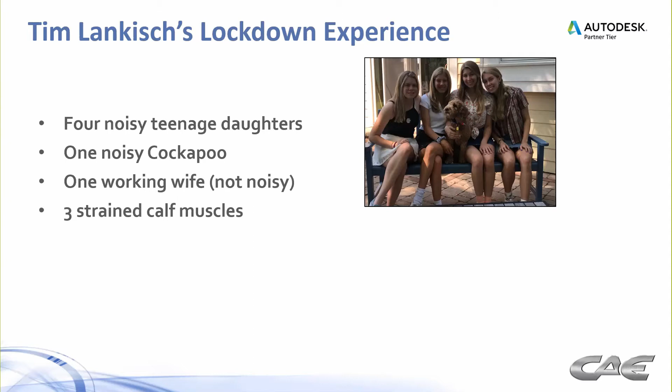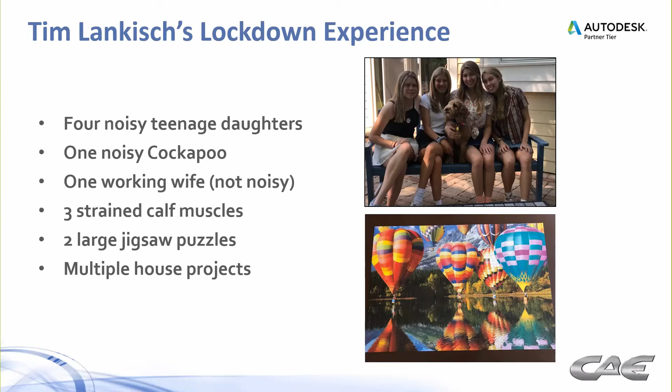So here's a little bit about my lockdown experience. I'm sure you guys have had similar experiences yourself, but I have 4 teenage daughters, and being at home with them didn't make for the most pleasant experience when it comes to the noise factor. Luckily, being on the ventilator project, I was deemed necessary, so I was able to come into the office. We have a small office here, and also a very noisy dog, Willie, in the middle of the picture. It was good to get away from the house and the noise while my children were home from school. My wife, unfortunately, had to bear the brunt of that. She was working up in our bedroom, and she's not a noisy one herself. At the beginning of the lockdown, I thought I'd try to get back in shape a little, and I tried running, and 3 strained calf muscles later, I decided 50-year-olds probably shouldn't try to run. Some of the fun we did: 2 large jigsaw puzzles, one a 2,000-piece puzzle, and multiple house projects. If you had to put a silver lining on this lockdown cloud, I guess those would be some of those things.

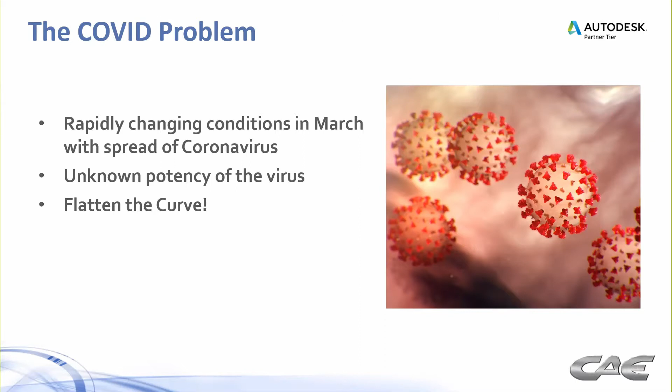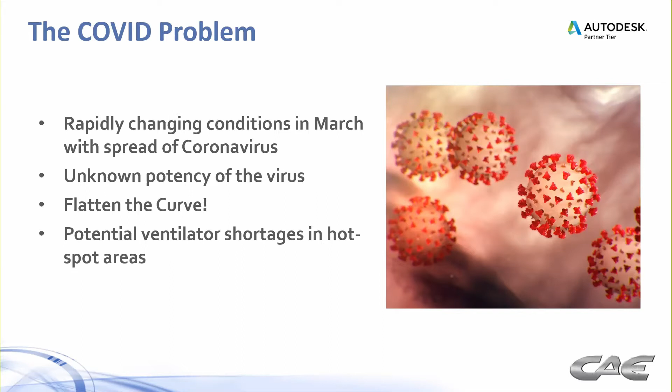So the COVID problem. You've heard chapter and verse on this over the last 4 or 5 months. Back in March, there were rapidly changing conditions with the spread of the coronavirus. Nobody really knew how potent it was. We talked about flattening the curve. Everybody was in rush, panic mode. Especially up in the Northeast, New York, and New Jersey, the potential ventilator shortages in those hotspot areas were becoming a real thing. So we had to bring the power of American manufacturing to bear on that. It's really interesting to read all the articles about how everybody came together, particularly in the plastics industry. We should be proud of what we've done with all the PPE equipment and ventilators. When the people and their government have a common purpose, great things can happen.

It's amazing how many of these stories we've seen in trade magazines. Autodesk's role in the manufacturing world is played out in hundreds, if not thousands, of ways during this crisis. The Make Anything model, from design tools to simulation tools to manufacturing tools, has played a huge role across the country. Moldflow's role in particular, which is what I'm going to talk about today, in the plastics manufacturing world - we'll show you a case study about how we brought the power of Moldflow to get a rapid response on this ventilator. I would argue that Moldflow's role in the plastics industry over the last 30 years, I don't know of much else that has had as great of impact as Moldflow has.

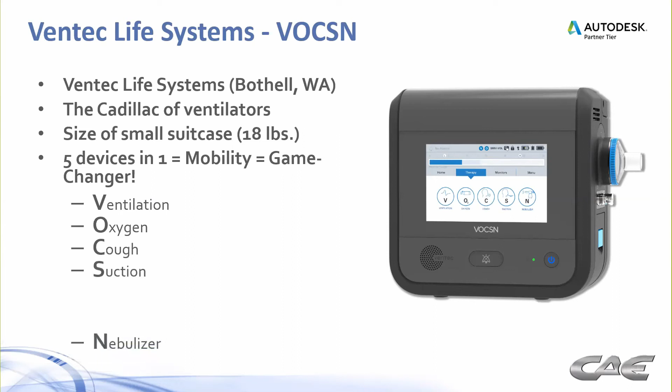Here's the ventilator we worked on. This is from Ventec Life Systems. This unit is called VOCSN, and you'll see why in a minute. Ventec Life Systems is up in Bothell, Washington, and if you recall, a lot of the beginning stories of the coronavirus were in Washington State. This is really the Cadillac of ventilators. It's not just a ventilator - it's the size of a small suitcase, about 18 pounds, and it's 5 devices in one. It gives people mobility that need these on a daily basis, and it's really kind of a game changer. People who need a ventilator, oxygen, cough, suction, and nebulizer used to have to carry around multiple units. Now all of these things are contained in one unit, and that, like I said, is really a game changer.

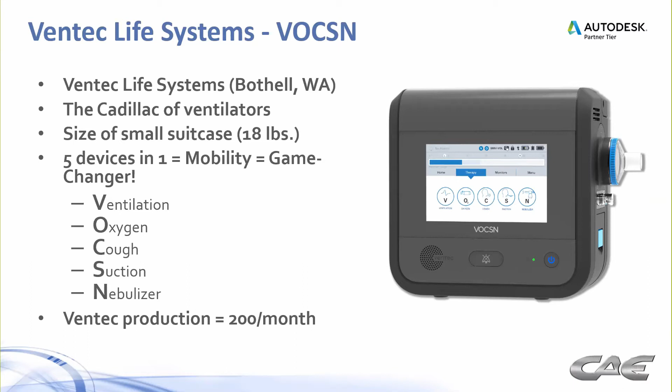Up to this point, before coronavirus, we'll call it BC, Ventec was up to about 200 of these units being manufactured per month. And when we're talking about thousands and thousands of ventilators being needed for this crisis, you can imagine what they were up against trying to ramp up their production to a much higher level.

So that's where GM comes in. The GM supply chain, with all the lockdowns and so forth, all of the car manufacturers went on lockdown themselves. So that opened them up to help with this project. They called it Project V for ventilator, and it brought their manufacturing might into play.

So the full story, if you want to get it, is on Ventec's website. You could probably get it on GM's website as well, and it's all over the news. Essentially, the government contracted with GM for $489 million to purchase thousands and thousands of ventilators.

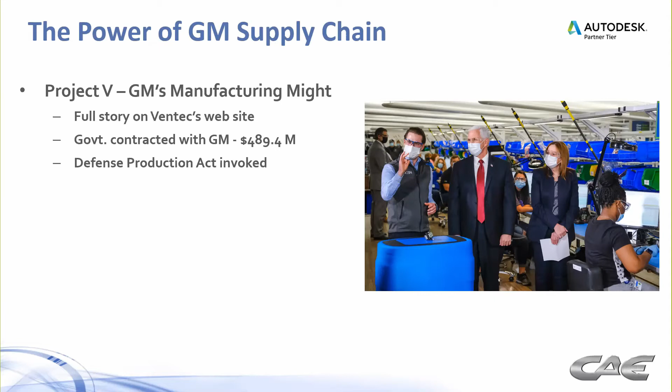The government invoked the Defense Production Act. The FDA was able to relax some of the usual enforcements on ventilators, the regulations, and they were contracted to produce 15,000 ventilators by the end of June and another 15,000 by the end of August.

So GM took their Kokomo, Indiana plant and retooled it, so to speak, to be able to produce these ventilators. And they deployed 1,000 workers to scale up production. Their capacity is 10,000 per month, and they're making it scalable if we get into a situation where more and more ventilators are going to be needed.

So just bringing that supply chain on board, something obviously Ventec was not in a position to do. They didn't have the huge supply chain to make thousands and thousands of parts like GM did. So a great relationship was formed there.

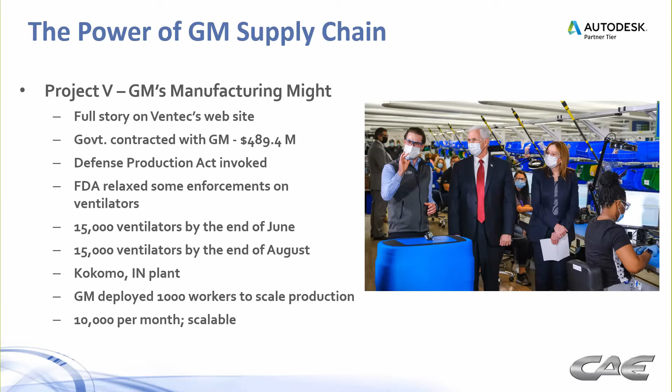So how did we get involved? We've had a long-standing relationship with GM ourselves. We're expert certified consultants, and anybody that knows anything about General Motors Moldflow standards knows that General Motors expects expert certified consultants to be working on their parts.

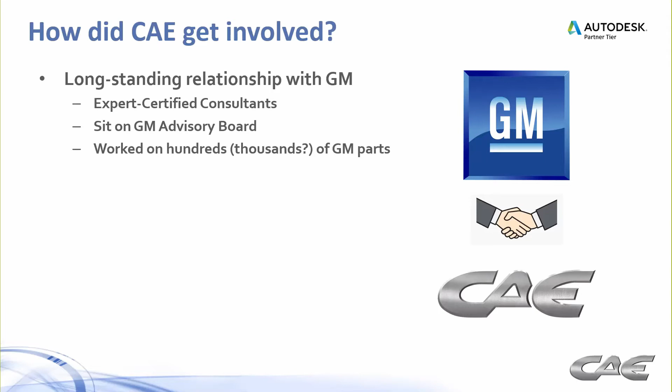So we've sat on the GM advisory board for many years. We've worked on hundreds, and I would argue possibly thousands of GM parts over the years. And then our windage expertise is brought to bear.

We'll talk about windage a little bit later in terms of helping correct some warpage issues on one of the parts that we worked on. We worked on several of the parts in this ventilator. There's nearly 800 parts. We worked on a bracket for an oxygen metering valve.

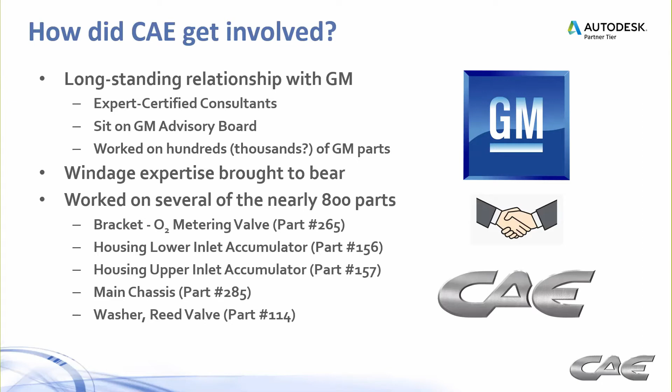It's kind of neat how they just numbered all these parts. Number 265, we worked on part number 156, number 157, part number 285, part number 114. But the one we're going to talk about is the bracket, this oxygen metering valve bracket.

So this is an exploded view of the whole VOCSN assembly. And you can see this piece right here is the one we worked on. And here's a blow up view of that. And of course, the part itself here. So a small part, a couple inches in size, but has a very important role in this product.

Here's another couple of parts we worked on down here, these oxygen sensors. We worked on the main chassis here, and so we've had our hand on several parts within this assembly.

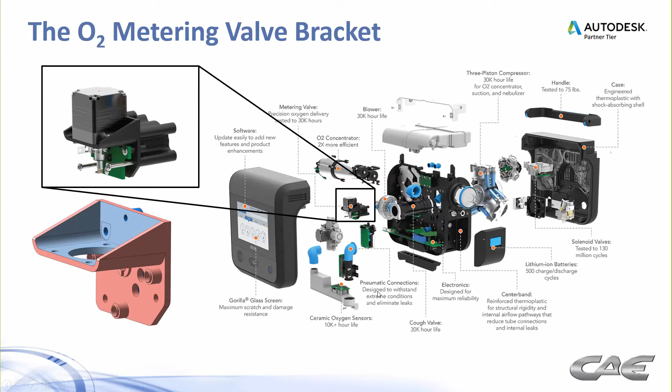So here's the oxygen metering valve bracket itself. It was originally machined out of PEEK, and then they at some point switched over to injection molding. It's a Victrex PEEK 450 FC30, with 10% high strength carbon fiber content, 10% graphite powder, and 10% Teflon all going into this material.

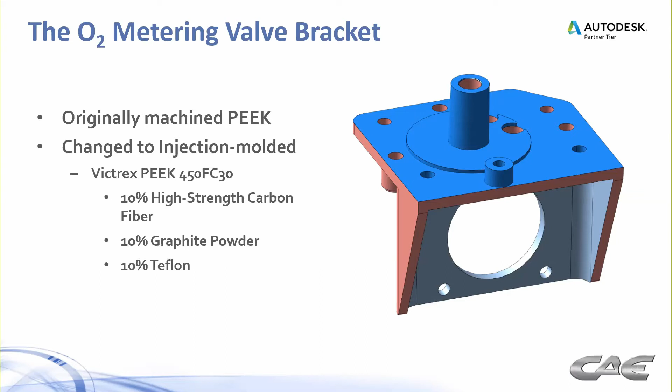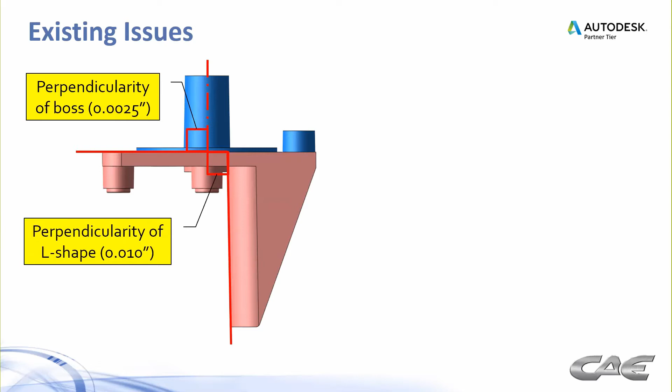So some of the existing issues they were having with this part, perpendicularity was a big one. The boss needed to be perpendicular within 2.5 thousandths vertically. And same with the L shape of that bracket, needed to be within 10 thousandths. And then also some very large sink marks on the top surface was something they also wanted to correct on this.

The project timeline is one of the big things on this. It was pretty amazing how this all unraveled. Of course, in late January, we saw the first COVID case in Washington State. Around mid-March, the U.S. government got together with GM.

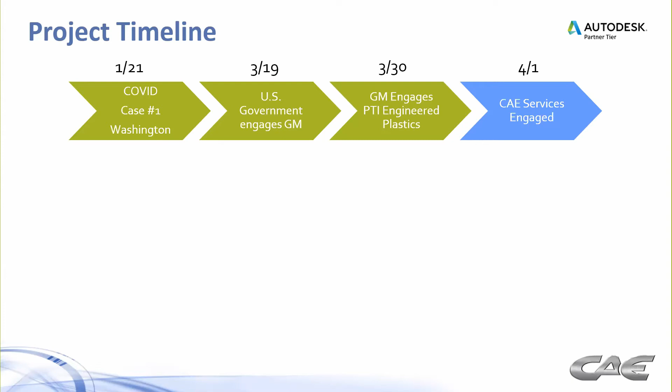By the end of March, GM was engaging PTI Engineered Plastics in Michigan on this particular part. And then a day later, on April 1st, we got engaged. By the end of day one, we had the first Moldflow results.

From some of those results, we realized we probably needed more robust material testing. So the next day that was kicked off, the material testing, and this is pretty phenomenal, was done within 4 days.

We were working on the CAD model, and we'll explain all this a bit later, but we're performing windage checks, and we delivered a windage model within a week. That's pretty unheard of in this industry. So again, rapid response in Moldflow allowed us to deliver this windage model within a week.

By 4/16, the tooling was completed and the first parts were molded. So pretty awesome delivery times on this. And these are stories that are playing around the country on a lot of different parts that are going into the COVID problem here.

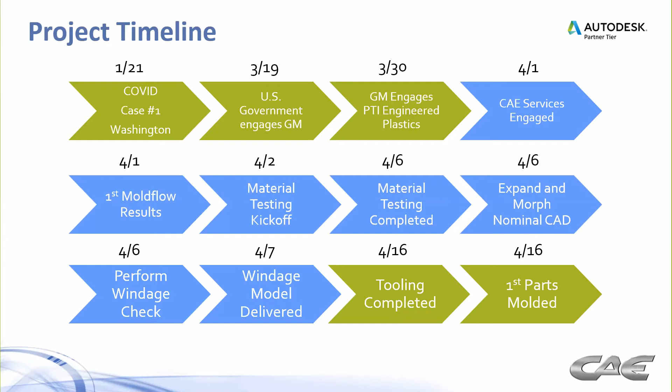So here are the Moldflow results on the existing mold design. We were handed the mold design, the cooling design, the gating, runners, and so forth. And here's the filling pattern that played out.

One of the things I want to point out is the non-uniform fiber orientation. Because of the gate location up on the front edge, you get some fibers aligning front to back, and some aligning left to right as the flow continued down that vertical wall where the large hole is. So fiber orientation plays out non-uniformly across this part. And as you know, non-uniform fiber orientation leads to non-uniform shrinkage, which leads to warpage.

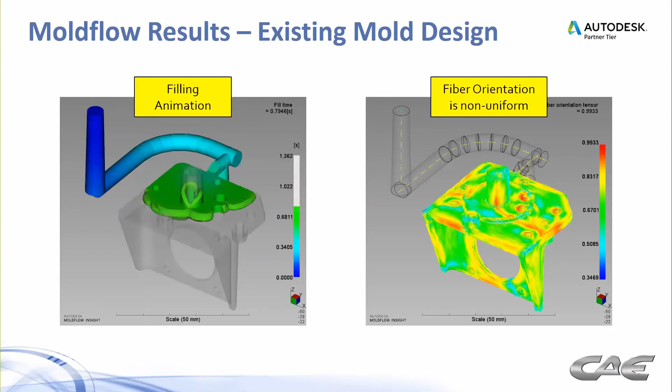Some of the pressure results: with the old material deck, we were getting around 14,000 PSI. When we got the new material back, it included D3 coefficients, so pressure-dependent viscosity, which caused a minor change to the pressures, a slight increase was observed.

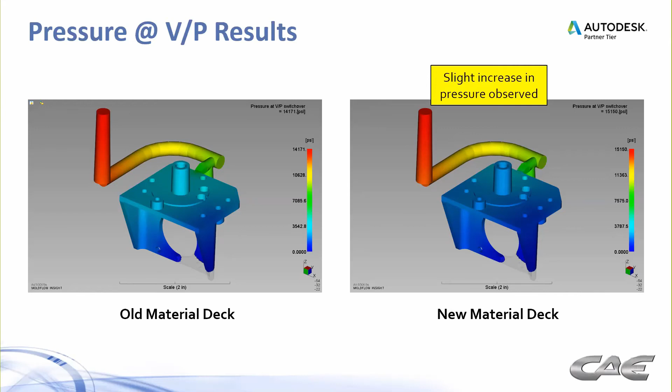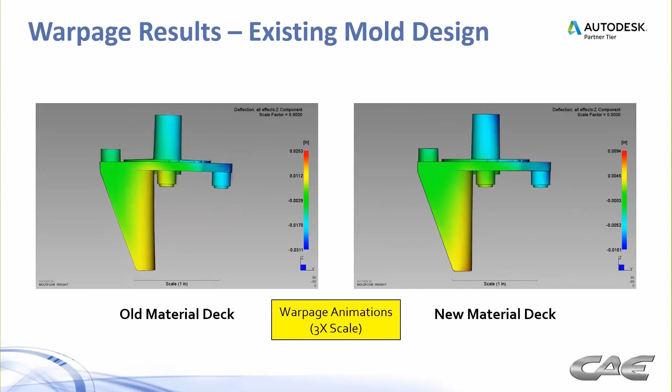And here are the warpage results. From a side view, you can see with the old material deck—blown up by a factor of 3—we were seeing the right trend in warpage, confirmed visually for us early on. But the magnitudes were much higher than what was being observed, which partly prompted us to get the material tested. When we got the new material back, the deflections and warpage were a lot more in line with what was being observed.

Here are a couple of overlays with actual results, scanned parts versus Moldflow results. On the left, some of the max deflections were around 14 thousandths. Here, the max deflection really was on the bottom, and we later found that the original parts actually had a thinner wall here, which is partly responsible for this deviation.

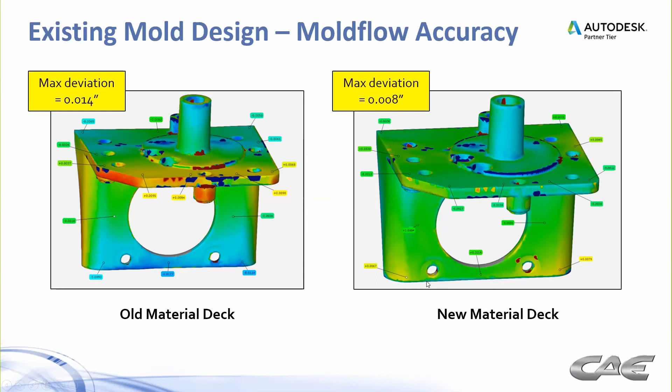But in general, the improved material data went a long way towards getting us very accurate results on the Moldflow analysis. One of the things I love about Moldflow is the ability to really hone in on what the major cause of warpage is. We had, of course, our suspicions, having done thousands and thousands of parts—we suspected it would be fiber orientation, but this helped us confirm it.

So you can see if we look at the orientation effects, that bend upward at that fulcrum point, and this front area moving downward, was due to the orientation effects. Cooling effects were minimal—those numbers are very small. Shrinkage effects, the numbers are larger, but that's really just the part getting smaller, as we see a gradual change in these colors from top to bottom. So this confirmed for us that the orientation effects were the main concern.

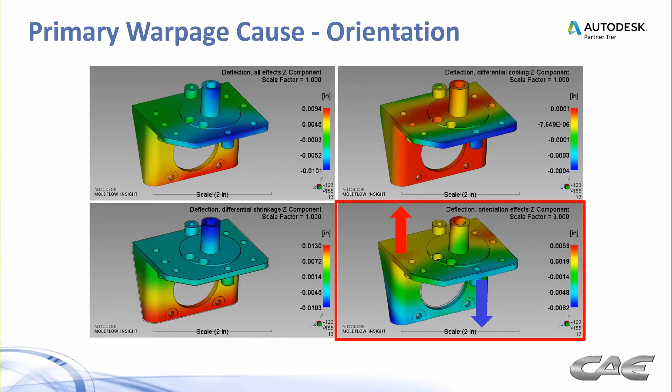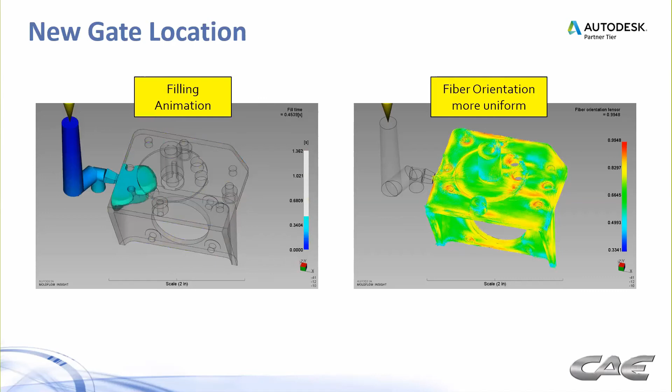So that was the first thing we wanted to focus on, to see if we could use the fiber orientation to our advantage and get some of the warpage out. We went with a new gate location, suggesting putting the gate on the side for two reasons. One, to get a more uniform fiber orientation pattern across the part—and you can see we achieved that, with more fibers going left to right and very few going front to back. That was one improvement.

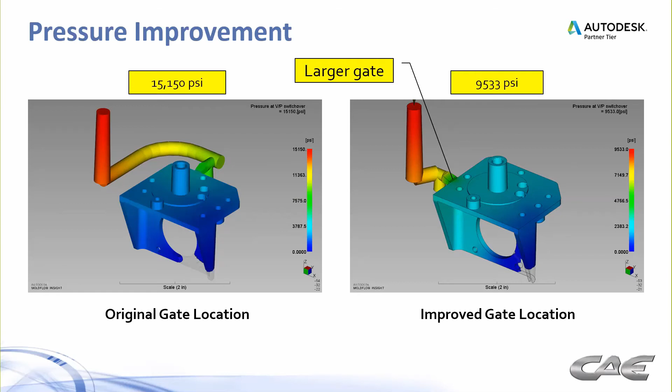The other thing was pressure improvement: 15,000 PSI was reduced down to 9,500 PSI because we have a much shorter runner now, and I'd argue also a more balanced gate location within the part. We also went with a larger gate to help pack out that thick area we showed before with the sink marks—larger, thicker, wider, allowing us to pack the part out a little better to help with the sink marks.

So when we look at the L shape warpage improvement, remember our idea throughout this was to get as much warpage out as possible through conventional means—meaning gate location changes, or in some cases cooling changes. Cooling wasn't a big player here, but in this case the gate location was. Just by moving the gate location, we were able to get a couple of thousandths out of the deflection.

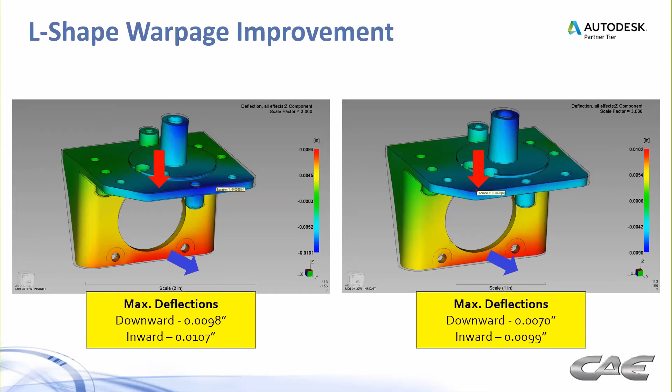So that downward deflection on the front edge there was reduced from 9.8 thousandths down to 7. And then the inward deflection of that vertical wall was slightly reduced, not a whole lot. That's not surprising because the fiber orientation in the vertical piece didn't change a whole lot.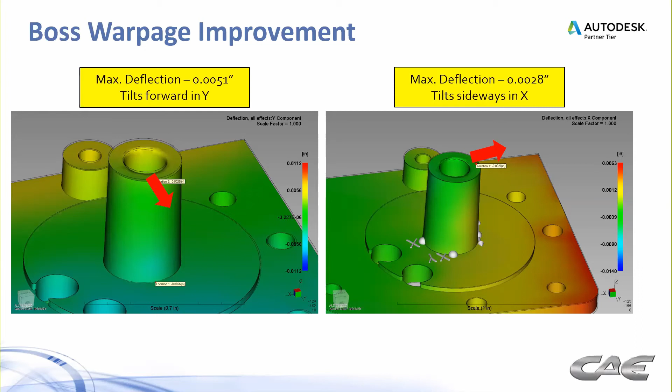And then if we look at the boss warpage, the max deflection on that boss was forward in the Y direction about 5.1 thousandths. By moving the gate location, it actually changed the direction of the tilt to the X direction, and that was about 2.8 thousandths. So an improvement there, but there was still some of that left to take care of.

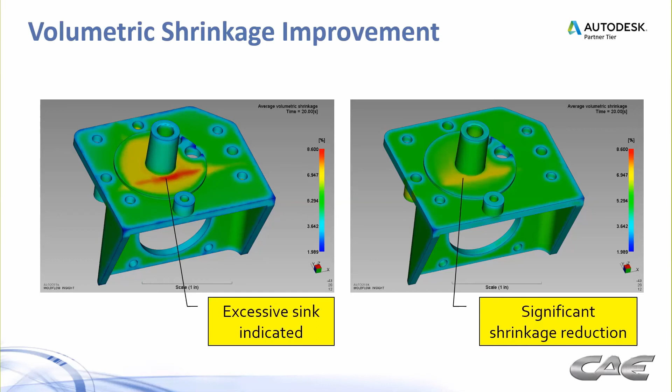And of course, like I said, we're trying to get rid of the sink, and part of the reason for moving the gate was to get that gate closer to the thicker area to help pack it out. In the original gate location, you see the excessive sink there. By moving the gate to the side, on the same scale, we were able to significantly reduce that shrinkage value. The sink mark estimate, you can see 0.17 millimeters there was reduced to 0.12.

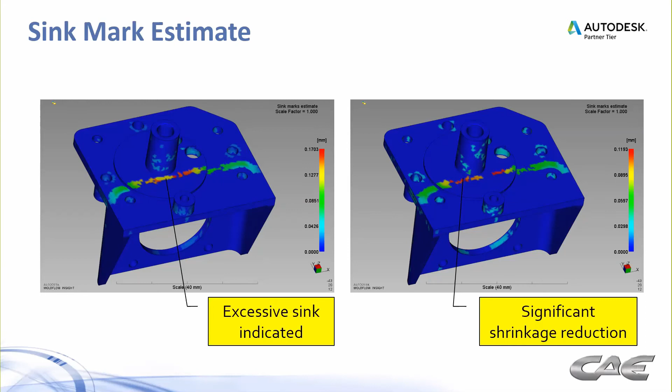So we got the shrinkage improved, we got the fiber orientation improved, we got the warpage improved, but we're still not where we wanted to be. And keep in mind, we're only just a couple of days into it here.

So the next thought is, well, let's go with windage. What is windage? Some people call it Kentucky windage. If you think about shooting at a target 1,000 yards away, or 1,000 feet away, with a Kentucky long rifle, if the wind's blowing left to right, you want to aim left to hit your target, right? So that's kind of where the term came from for those of you who are not familiar. The term applies in injection molding.

So what we're doing is we're biasing the steel in the opposite direction of the expected warpage and getting that warpage to come back to the nominal or target shape. That's what windage is all about, and that's what you can use when the conventional approach doesn't get you where you want to be.

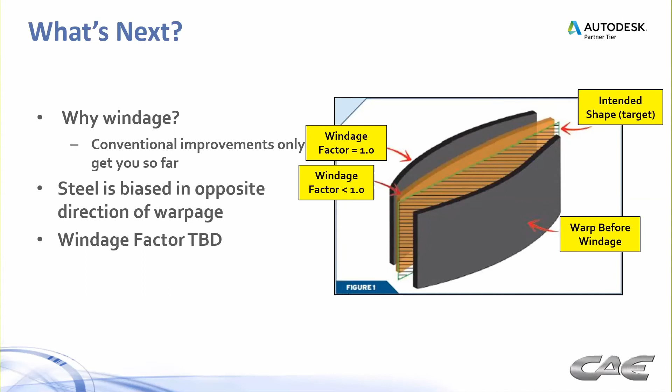So we did as much as we could with gate location. We're on a fast track here, we needed to get things done. Not much we could do with part design, so we had to go with the windage approach.

So the first step is to determine how much windage. The temptation is to say, okay, if we're going to warp 1 millimeter in one direction, let's just bias it 1 millimeter in the opposite direction and we're good to go. Well, that's not always the case. Sometimes that factor might be 90% of that 1 millimeter, or maybe it's half of that millimeter. It really depends on the shape of the part, depends on the material, depends on the process. So we have to go through an iterative process to find out what that windage factor is.

And this is another really nice feature in Moldflow: you have the ability to take your warpage results and morph the part in the opposite direction. Just take the mesh, put it in at a factor of -1, and it'll produce a mesh that is in the opposite direction of the warpage that was predicted in the initial simulation.

Keep in mind that Moldflow is not going to do any die draw corrections for you. It's just taking the opposite shape of what the predicted warpage was. And if you're a mold maker, these die draw corrections are important—otherwise, you could get some features that would get into a die lock condition, and that's bad news for everybody.

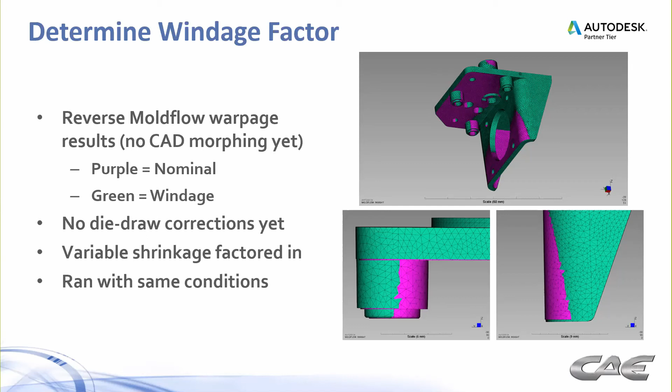And then, of course, we're running it with the exact same process conditions as we did previously. So we ran the initial windage, and we did a windage check at a windage factor of 1, and you can see everything came out pretty much dead nuts on. All these deflections, or deviations I should say, are darn close to 0.

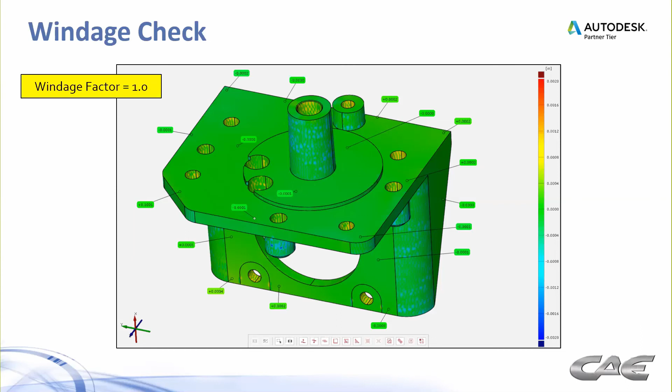So that is confirmation. When I overlay my Moldflow results with the nominal shape of the part and come this close, that tells me I've got the right windage factor. In this case, the windage factor was indeed 1, which is fine. Most of your parts are probably going to come out that way, but it's something we have to check.

And then the next step after we figure out the windage factor is what shrinkage are we going to use? As I mentioned before, the shrinkage numbers in Moldflow are variable. If you poke around a part and look at the shrinkages, they're going to be an infinite number of different numbers across the part. So we look at the material supplier's published information, which is good. It's a good guide, but it's not the be all and end all.

In this case, the shrinkage in the flow direction was published to be 0.3%, so an expansion factor of 1.003. And then the cross flow or cross fiber direction would be 1.007.

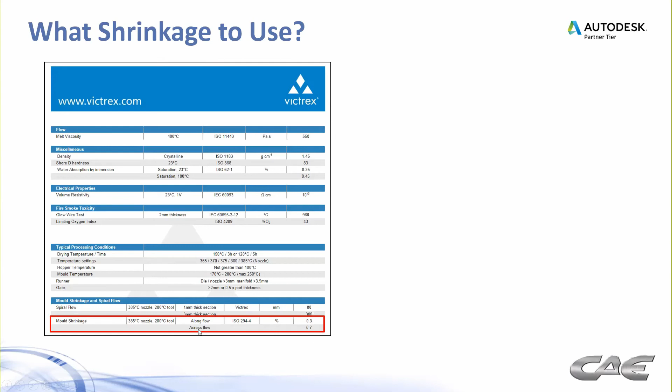Okay, so that wasn't quite matching up with what we were seeing in Moldflow. And keep in mind, we had good Moldflow data now. So we're seeing something in the 6 to 9 range, 6.5 to 9, for these estimated composite shrinkage values. So we had a lot of discussions with the material supplier.

And in fact, a little dig on Moldflow's competition, Moldex - the shrinkages being predicted by the Moldex software were something over 10 to 17, if memory serves me correctly. So with Moldflow, we felt pretty good about these numbers, but they weren't quite matching up with the Victrex numbers on the published sheet.

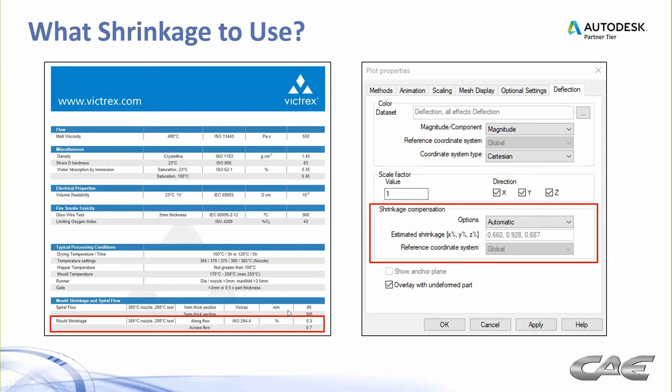So after some discussions and looking at Moldflow results, these are the numbers we ended up with. In the direction of flow across the part, we have a lower shrinkage number, which is what you'd expect. Same in the vertical direction, because a lot of those fibers were aligned vertically on that vertical wall. And then our highest shrinkage number was transverse to those fibers, in the 1.008 direction, front to back.

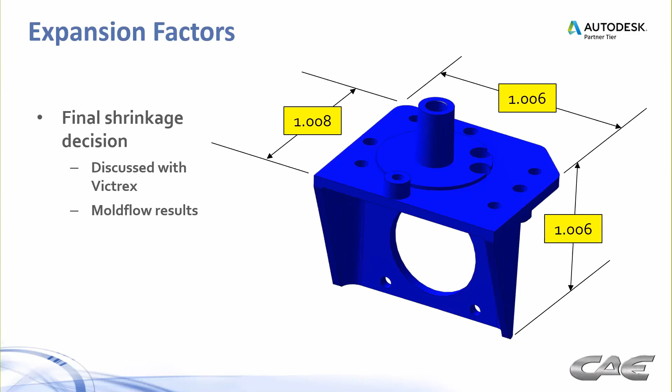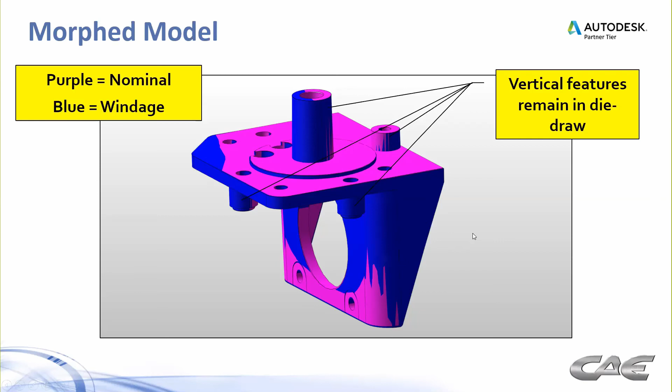So that's what we ended up expanding our part by before we went to the morphing phase of making a usable CAD model for tooling. And here's the final morphed part - the nominal is in purple, and the blue is the windage. One of the tricks in the CAD morphing is we have to keep those vertical features in die draw - all the bosses, the holes, you name it. That's the trick of the trade there.

And then after we morph the part, now we have to go back and do yet another windage check. You can see some of the features are now a little bit off, and they fall usually in the category of those vertical features. This one was 0.003 off. These sidewalls, we decided not to correct - they were bending inward and showed some of the largest deviations. But there were no critical dimensions on those sidewalls.

In order to correct that, there was a slide forming the back side of this thing, and that would have caused some tooling corrections that would have been more time consuming and probably more expensive. So we decided not to correct those sidewalls, and that bears out here in these results.

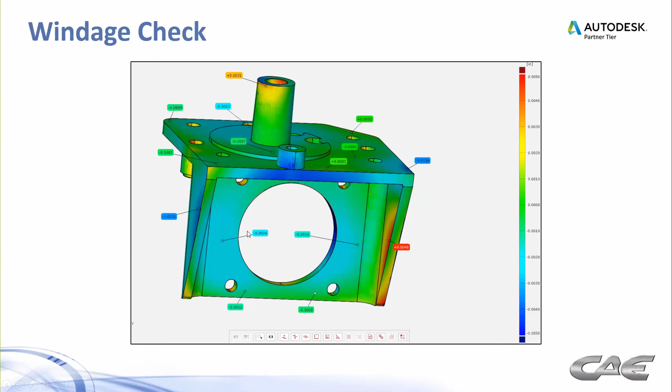So first molded samples on April 16th. Here's some of the CMM results that came from that. The perpendicularity of the L shape was within spec, 10 thousandths. We were seeing 6 pretty much across the board.

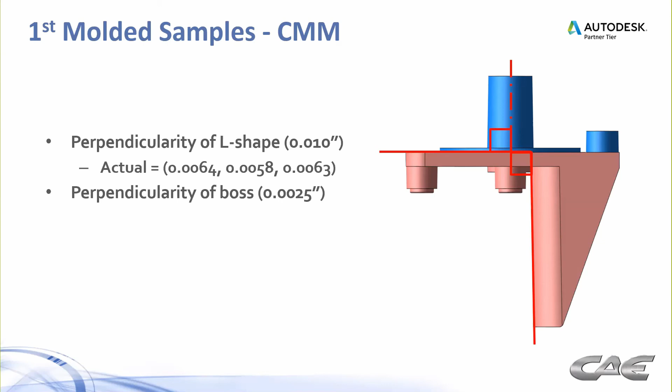The perpendicularity of the boss, the spec on that was 2.5 thousandths. From 3 samples, we did see one that was out of spec, and that was likely because of trying to keep vertical features in die draw. So we confirmed that.

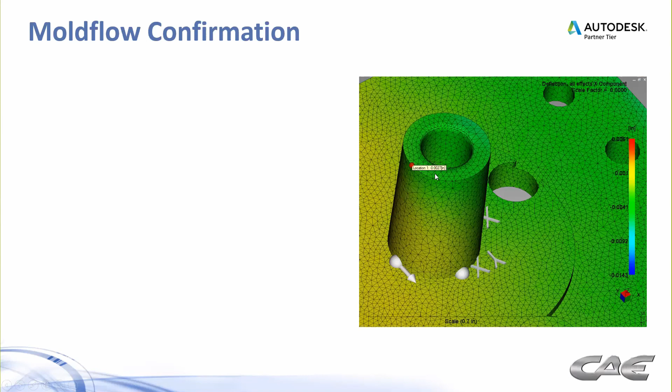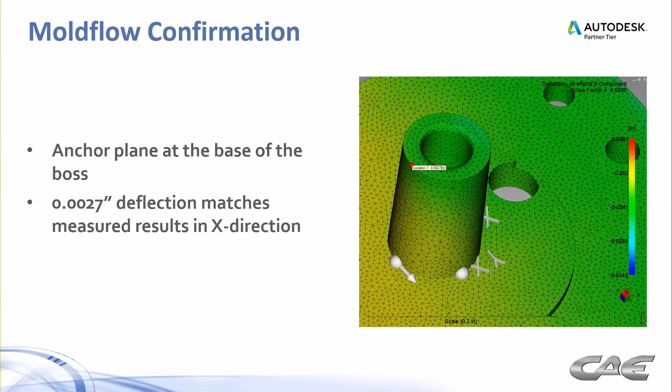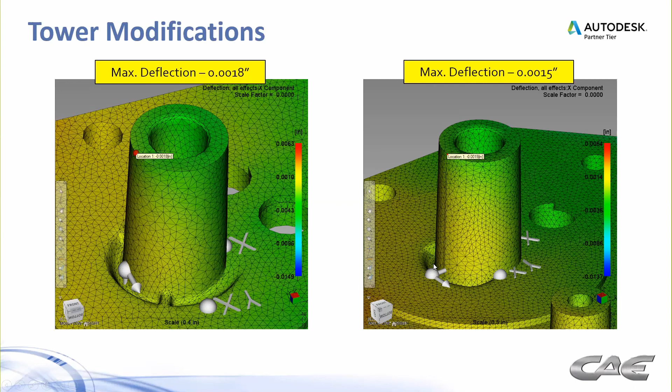This is kind of a ramped up moat with a couple of ribs on it. That was at 1.8. This had another kind of a half moat design. That was at 1.5.

But the best design came from trying to core some of the material out of the boss. This is not a sealing surface, there's a spring that goes around this thing. So we were able to carve some of the material out of this.

First idea was to carve just material out on one side of the part, and you can see that got us at less than 1,000th deflection from top to bottom. One of the problems we came up with on that is that we didn't catch this. There's a keyhole on the back side of this, and it was causing some non-fill issues in that area.

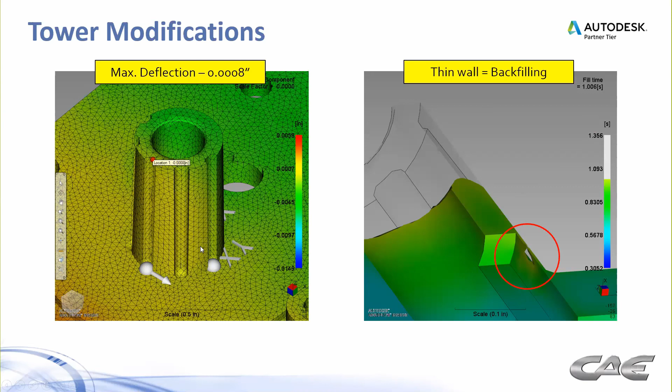So we had to modify that, and our final design, here's that modification there. We decided to put that spline around the full perimeter, so we were able to carve material out of the boss. And you can see that from top to bottom, that deflection was very near zero.

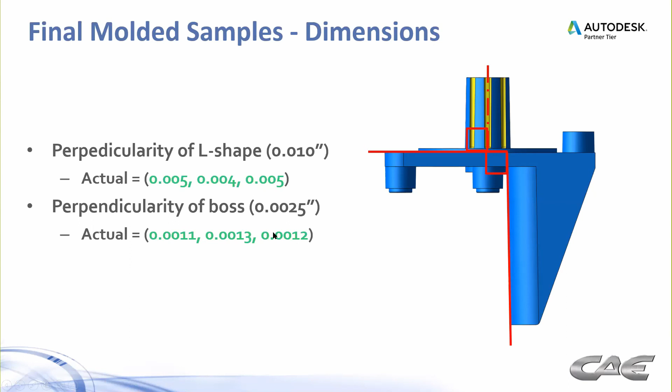So this is the design that we ended up with. Here are some of the molded samples, CMM results. The L shape actually improved even more, and the perpendicularity of the boss was well within spec. Didn't quite get down to the 0.0003 that we predicted in Moldflow, but we'll take this.

So that's our design. What do we learn from this? I think the big takeaway is that rapid Moldflow is possible. Moldflow oftentimes is something that's an afterthought, and by the time people get around to thinking about using it, oftentimes it's too late because they think it takes weeks and weeks and weeks to do. But really, rapid Moldflow is possible.

It takes the right people. Experience matters, and obviously we at CAE Services have been around the block. It takes the right relationships - Ventec with GM, and then GM with PTI, and GM with us. The right relationships make a difference, and us knowing how GM works in their plastics manufacturing world made a big difference on this.

The right software, of course, Moldflow really is the gold standard when it comes to plastic injection molding simulation. It's developed and matured into something we can rely on instead of using Kentucky Windage, to the point where we're creating morphed CAD models within a week to use in a mold design to produce parts this quickly. That would have been unheard of 10 years ago.

Having a common purpose - obviously the government, I mentioned before, stepped up and put this whole thing into motion with GM and Ventec. Another takeaway I would say is that warpage analysis is here to stay.